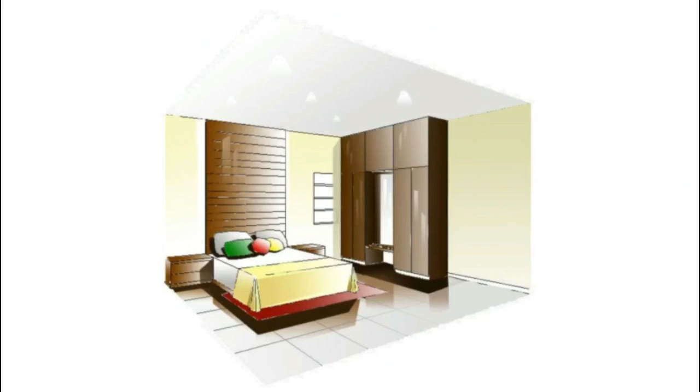Hello friends, in our last video we saw how to draw a one-point perspective the methodical way. In this video we will see how to draw a two-point perspective the methodical way. Because the rendering done here is only indicative, we'll be seeing mainly the drawing part.

This is the basic plan of the room with all the relevant data required to draw a two-point perspective. The plan is set to an angle of 60 degrees with the picture plane. The line of vision and the station point distance are indicated. The cone of vision from the station point is less than 60 degrees, which is ideal because otherwise the perspective gets distorted. All the relevant dimensions are mentioned here and you can always come back to this slide in case you want to refer to anything.

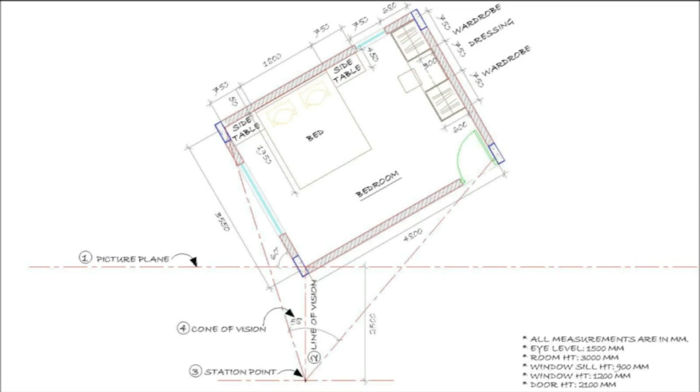To start with the drawing, we first mark out the picture plane, then the line of vision a little to the left side of the paper, on which we mark the station point from the picture plane as given in the initial drawing. From the station point, we draw a line at 60 degrees, which is our perspective angle. This line should intersect the picture plane to get vanishing point number 1. On the right hand side, draw a line from the station point at an angle of 30 degrees to intersect the picture plane to give you vanishing point number 2.

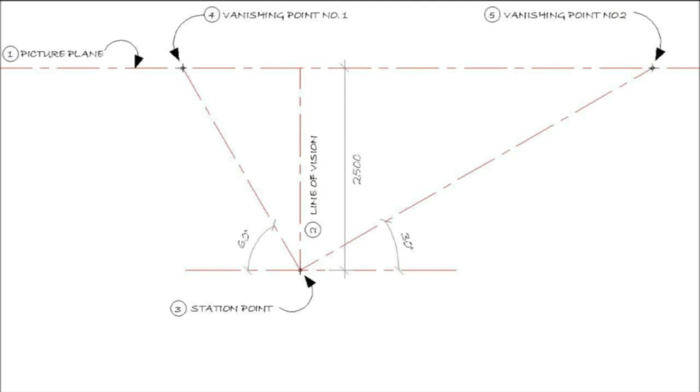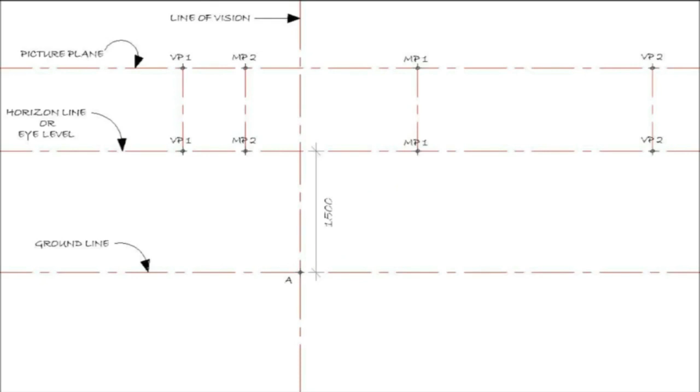Drawing arcs from vanishing points 1 and 2 will give you the measuring points 2 and 1 on the picture plane. Then draw the horizon line or eye level roughly at the center of the paper. Then below the horizon line, draw the ground line at a distance of 1500, which is our eye level. Then transfer both the vanishing points and the measuring points onto the horizon line with vertical lines. So now we have the basic apparatus, that is the line of vision, the horizon line, the ground line, the vanishing points and the measuring points.

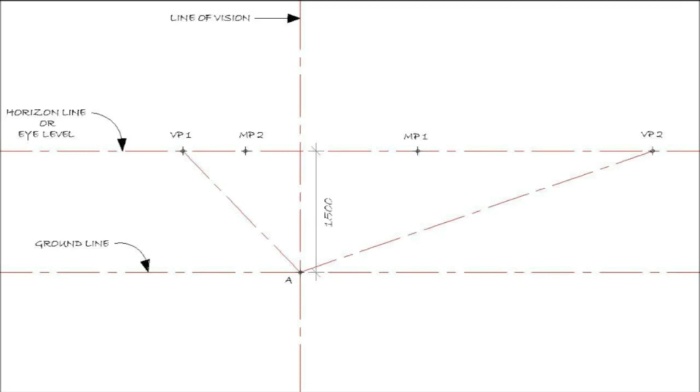Now point A is the intersection of the line of vision with the ground line, and we join point A with both the vanishing points. These are the ground lines of the room in perspective. Now mark out the height of the room at a distance of 3000 from point A to give you point B, and join B to both the vanishing points.

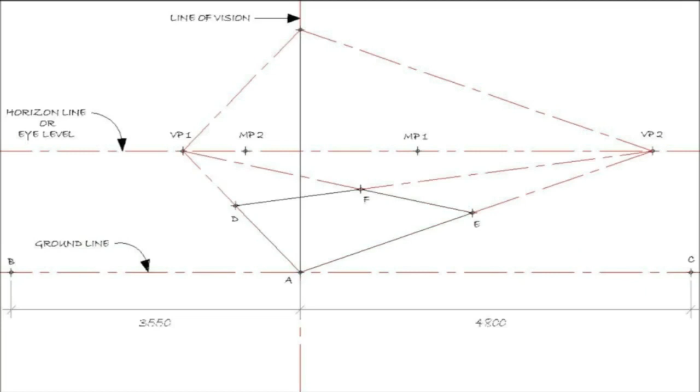Now for the room width, on the left side of the line of vision, take point B at a distance of 3550 from A on the ground line, and for the length of the room, take point C at a distance of 4800 on the ground line. Now join B and C to the opposite measuring points to get D and E. Joining D and E to the opposite vanishing points will give you F, which gives you the basic floor plate. Taking verticals at D, E, F will give you G, H and I, which completes the basic block of the room.

Now to mark up the window position, we mark points D and E at a distance of 680 and 750 as given in the plan, and then join them to measuring point 2 to get G and F. Joining G and F to vanishing point 1 will give us H and I. Then we take verticals at H and I.

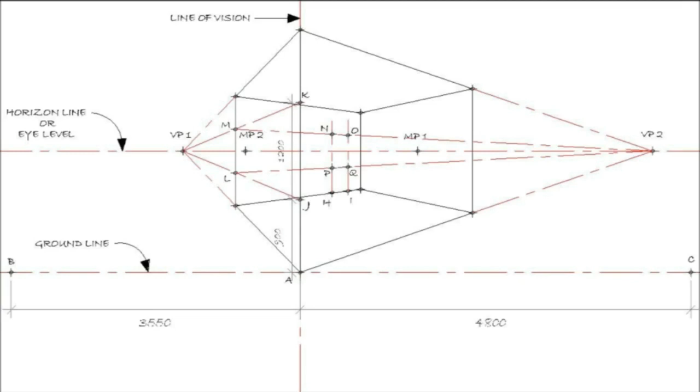Now for the window sill and height, we mark points J and K at 900 and 1200 from A on the line of vision. Then join J and K to vanishing point 1 to get L and M. And then join L and M to vanishing point 2 to get N, O, P, Q. This completes the window N, O, P, Q.

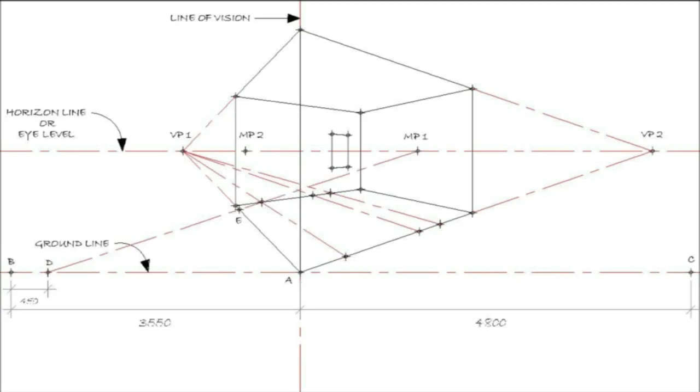Now we start marking the furniture in plan, and for that we take points D, E and F at 750, 1800 and 750 and join them to measuring point 2 to get G, H and I. Connect G, H and I to vanishing point 1 to get J, K and L. Now for the depth of the side table, we take point D on the ground line from B at a distance of 450 and join it to measuring point 1 to give E. Joining E to vanishing point 2 will give us F, G and H.

Now for the depth of the headboard and bed, we take points D and E at 50 and 1950 from B on the ground line and join them to measuring point 1 to get F and G. Joining F and G to vanishing point 2 will give us H, I, J, K. This gives us the position of the bed and the two side tables in plan on the floor plate.

Now for the wardrobe depth, we mark point D at 600 from C on the ground line and join it to measuring point 2 to get E. Joining E to vanishing point 1 will give you F. Now for the three components of the wardrobe, we mark points G, H and I at 750 each from B and transfer them to measuring point 1 to get J, K and L. Joining J, K and L to vanishing point 2 will give you M, N, O, P, Q and R. This completes all the furniture in plan on the floor plate.

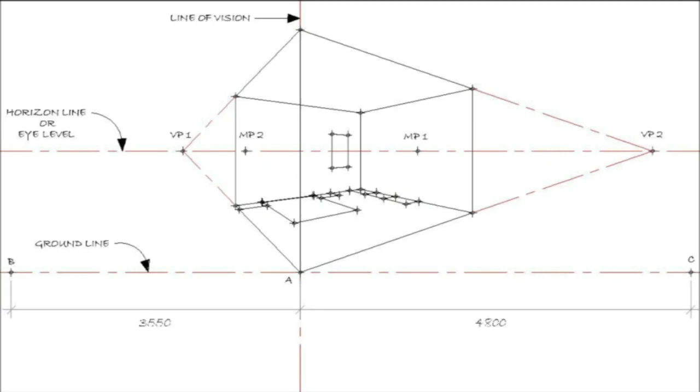Now we draw out verticals from all the vertices that we obtained on the floor plate. Now to mark out the heights of the side tables, we take point D on the line of vision at 450 from A and join D to vanishing point 1 to get E and F. Joining E and F to vanishing point 2 will give you G, H and I, and joining G, H and I to vanishing point 1 will give you J, K and L. Extending the lines from G and H further from vanishing point 1 will give you M and N. This gives us the basic block of the bed and the two side tables.

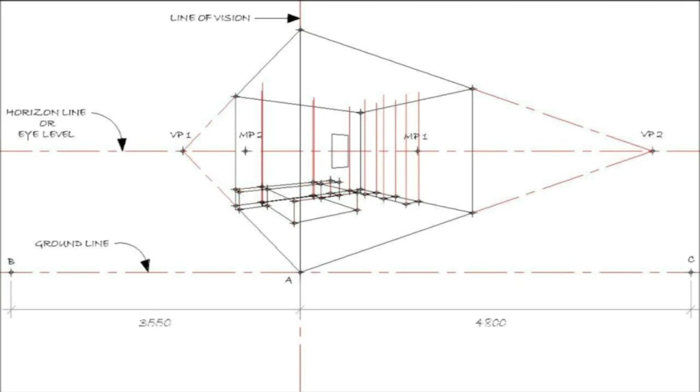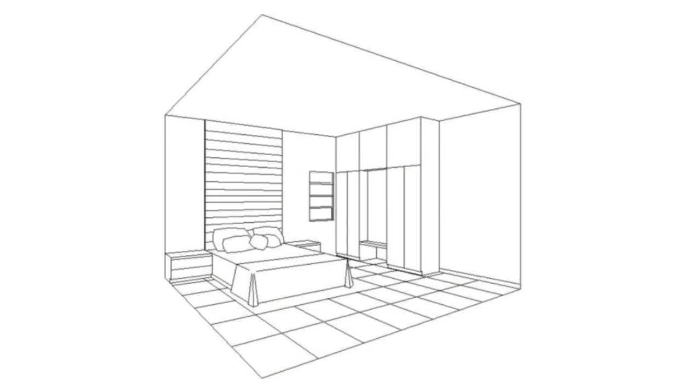Applying the same principles that we did for the bed and the two side tables, we take the heights for the two wardrobes and the central dresser unit. We draw the floor lines directed at the two vanishing points, and we also add in a few accessories here and there. The finished line work will look like this, which you can render in any medium of your choice, like in watercolors as I have shown in my earlier videos, or color pencils or poster colors or anything. Even black and white rendering, which I will be showing sometime soon.